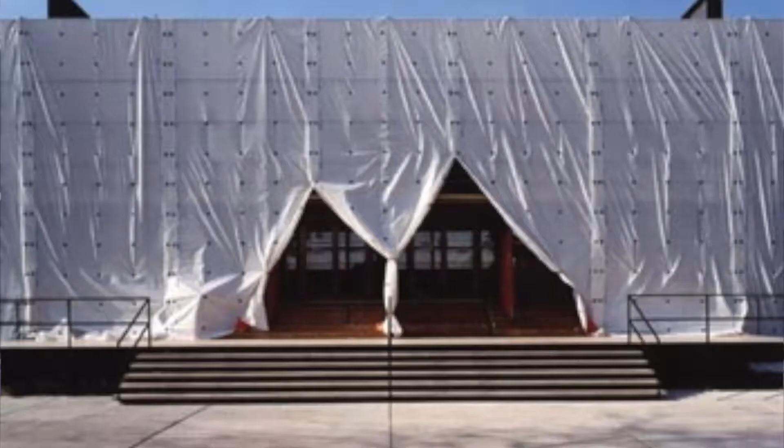50 years after opening and in need of major repairs, Crown Hall is benefiting from a multi-phase project to restore and preserve this 20th century icon. IIT's Mies van der Rohe Society, committed to preserving the architectural heritage of Mies, assisted in the campaign to raise $4 million to fund this effort.

Under the guidance of architects and IIT alumni Krueck and Sexton, along with faculty member Gunny Harboe, endeavored to research, analyze, and execute every detail, which resulted in a textbook demonstration in the appropriate preservation of a modern architectural masterpiece. With the support of the College of Architecture and acclaim from architectural critics and historians, Crown Hall continues to have a relevant place in the education and inspiration of all who attend. Currently, the Mies Society is raising funds for the restoration of Crown's front door, its south porch, and steps.

Directly south of Crown Hall is the 3410 South State Street building. Built in 1950 as part of the complex of 5 buildings for the Institute of Gas Technology, this building has an exposed concrete structural frame that is infilled with Mies's signature brick and steel windows. The industrial character of the building is elevated by the careful execution of studied form and proportions. Today, it is being utilized by the university for additional classrooms and to house the Ph.D. program for the College of Architecture.

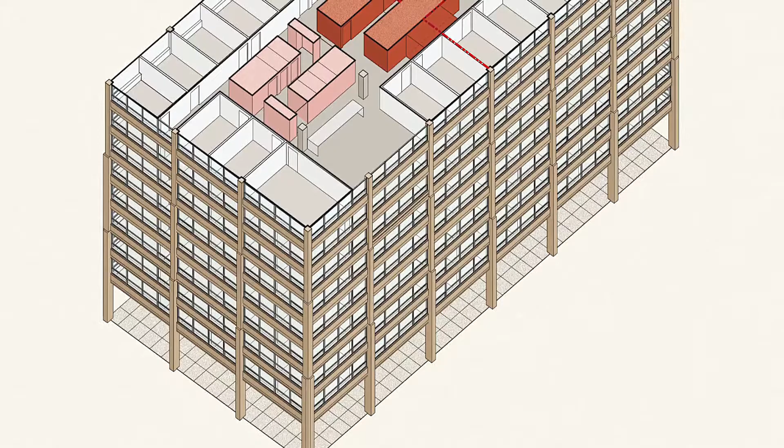Built in reinforced concrete, they rely on a structural system that recalls his treatment of the Promontory apartment building completed in 1949 on South Lakeshore Drive. Like the 860-880 apartment buildings, Mies set the fully glazed ground floor lobby back from the facade to align the columnar grids of all three buildings on the site.

George J. Kacek Hall, named after alumnus George J. Kacek, Electrical Engineering '54 and Master of Science '55, opened its doors for the first time in August 2020. Kacek Hall is a legacy building by Mies, revitalized by alumnus, architect, and College of Architecture professor Dirk Denison. It imbues classic modernism with a vibrant new living experience for first and second year students.

We are facing our other noteworthy student housing project, named recently in recognition to their philanthropy. The Jean and John Rowe Village was completed in 2003. When Mies arrived in 1938, State Street was a buzzing entertainment zone known as the Stroll. This is where much of the development of modern jazz, blues, and gospel music took place from 1920 to 1950.

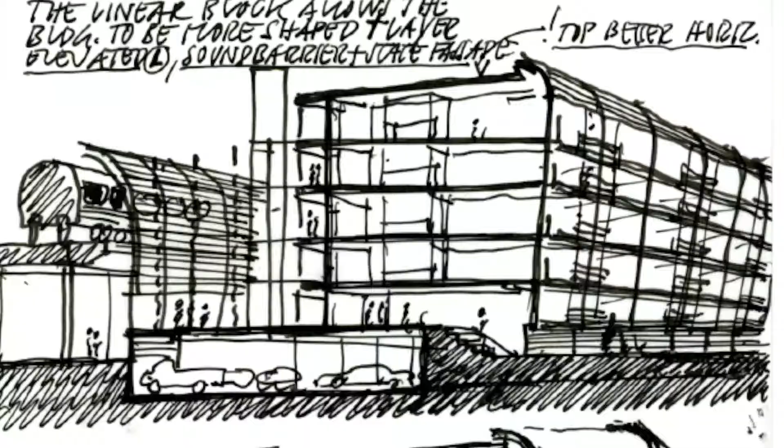In 1996, Mayor Richard M. Daley joined Illinois Tech's two great benefactors, Robert Galvin of Motorola and Robert Pritzker of the Marmon Group, in an unprecedented agreement to rebuild the campus. The city of Chicago built new police headquarters at the south end of the campus to show its commitment to this part of the city.

As part of the city's streetscape program, the mayor also funded the transformation of State Street and 33rd Streets as they passed through the campus.

Jean and John Rowe Village was designed by famed architect and alumnus Helmut Jahn. Some of Jahn's best-known contributions to the built environment include the United Terminal at O'Hare International Airport and the James R. Thompson Center in Chicago.

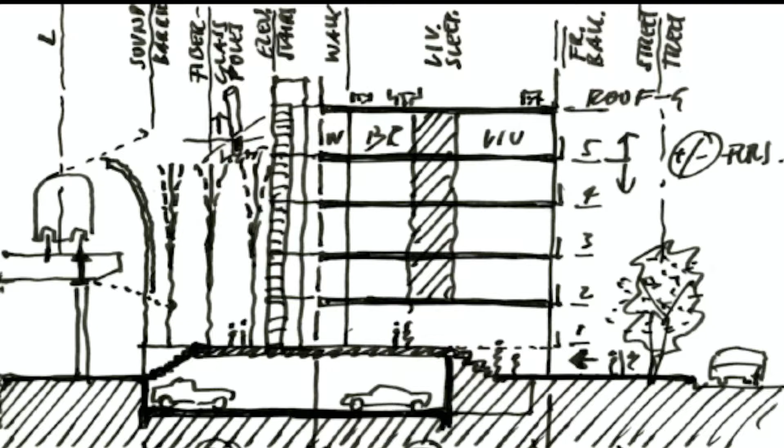The village provides another creative use of space along the L tracks. It has an elegant glass wall that also muffles sound and provides a new visual setting for the campus. Instead of creating a block-long building that would put up another barrier, Jahn designed a series of pavilions linked by landscape courtyards, glass-walled lobbies, and passages between the academic and residential sides of the campus that make the building semi-transparent.

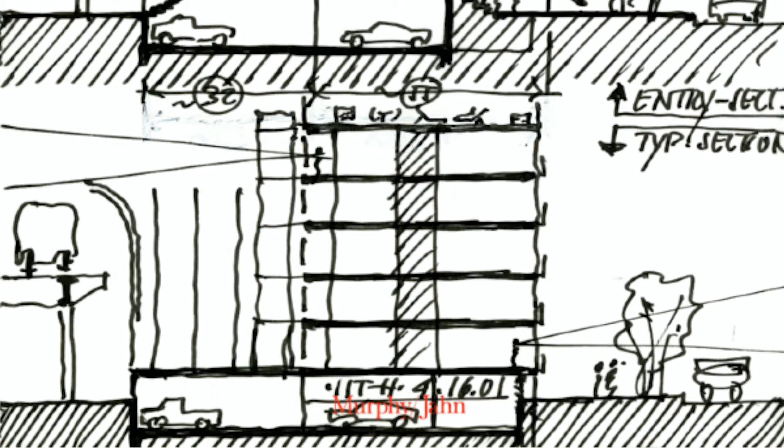The three U-shaped buildings house 367 undergraduate and graduate students. Each courtyard is lined at the rear by insulated glass walls that rise to the full height of the building. Every room has floor-to-ceiling windows and views of a courtyard. The corrugated metal on the exterior resembles the exterior of a train car, mimicking the elevated train just beyond.

The Illinois Institute of Technology's Mies campus is universally recognized as a landmark in the history of modern architecture and education. We hope that you have enjoyed our tour today and that it refreshes some memories and preserves an interest in staying connected with Illinois Tech.